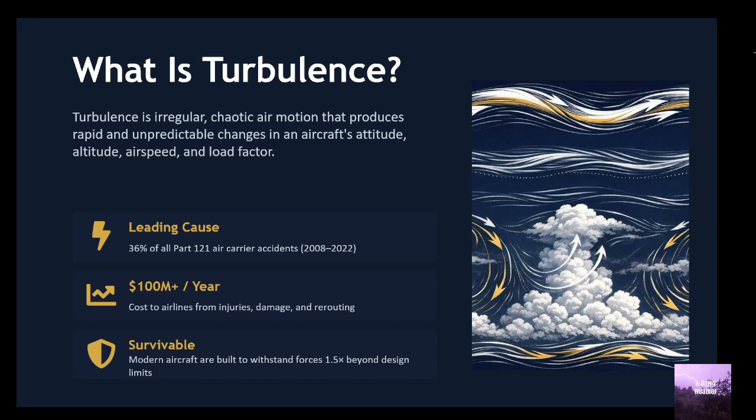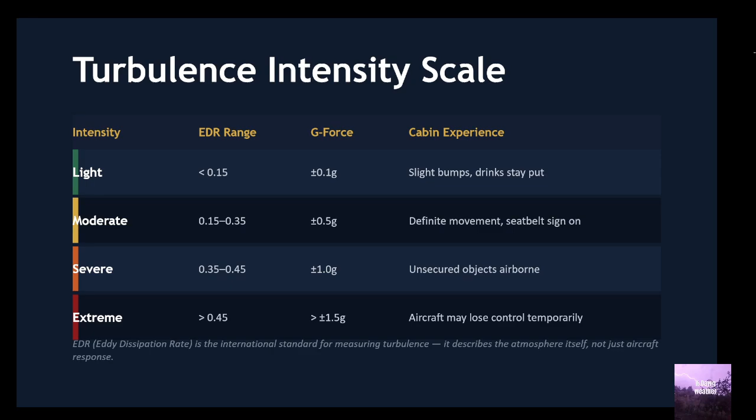Next intensity is moderate, 0.15 to 0.35. The G-force is 0.5 G. The cabin experience is definite movement, seatbelt sign on. Severe, 0.35 to 0.45, plus 1.0 G. Unsecured objects airborne. Extreme, greater than 0.45, greater than 1.5 G. Aircraft may lose control temporarily.

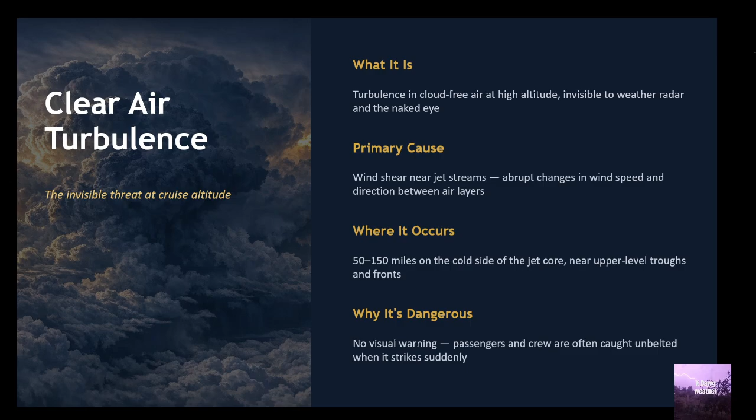Clear air turbulence, the invisible threat at cruise altitude. What is it? Turbulence in cloud-free air at high altitude, invisible to weather radar and the naked eye. Primary cause is wind shear near jet streams, abrupt changes in wind speed and direction between air layers. Where it occurs: 50 to 150 miles on the cold side of a jet core near upper level troughs and fronts. Why is it dangerous? No visual warnings. Passengers and crews are often caught unbelted when it strikes suddenly.

Convective turbulence is generated by vertical air currents from surface heating, the most common type of turbulence in fair weather. Thermal updrafts: the sun heats the surface unevenly, creating rising columns of warm air, strong over dark surfaces like asphalt and plowed fields on hot afternoons. Thunderstorm cells: intense convective turbulence in and around cumulonimbus clouds. Updrafts can exceed 6,000 feet a minute, with severe downdrafts nearby. Microburst: concentrated downdrafts that spread on contact with the ground, extremely dangerous during takeoff and landing phases.

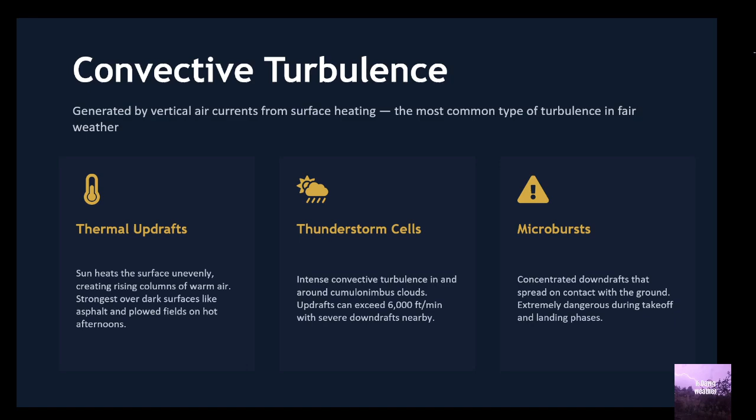Mechanical and mountain wave turbulence. Mechanical turbulence is caused by surface friction and obstacles disrupting smooth airflow. Buildings, terrain, and vegetation create eddies near the surface. Most intense at low altitude and strong winds. Common near airports with nearby structures or terrain. Mountain wave forms when stable air flows over mountain ridges, creating oscillating waves that can extend to the stratosphere. Rotor zones beneath waves cause severe turbulence. Lenticular clouds are visual indications of wave activity.

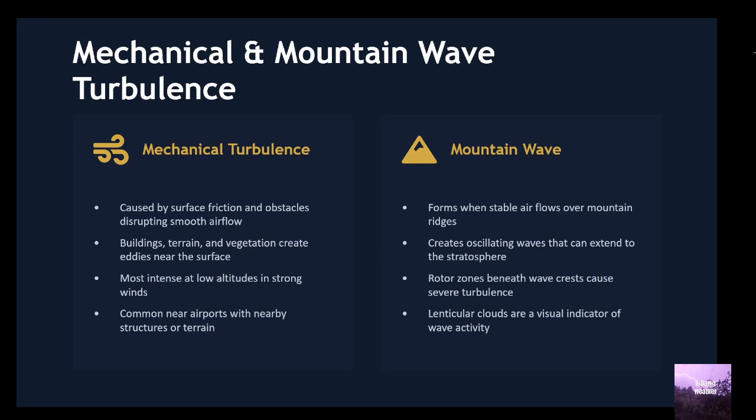Wake turbulence. Vortices generated by aircraft wingtips, a human-made hazard that demands careful separation. 2 to 4 nm required separation behind heavy aircraft. 6 nm, which is nautical miles, required behind the super heavy A380. 900 feet a minute vortex sink rate initially. Wingtip vortices are strongest behind heavy, slow, clean configuration aircraft. Vortices sink at 400 to 500 feet a minute and persist over several minutes. Crosswinds can drift vortices into adjacent runways or flight paths. ATC enforces mandatory spacing intervals based on aircraft weight categories.

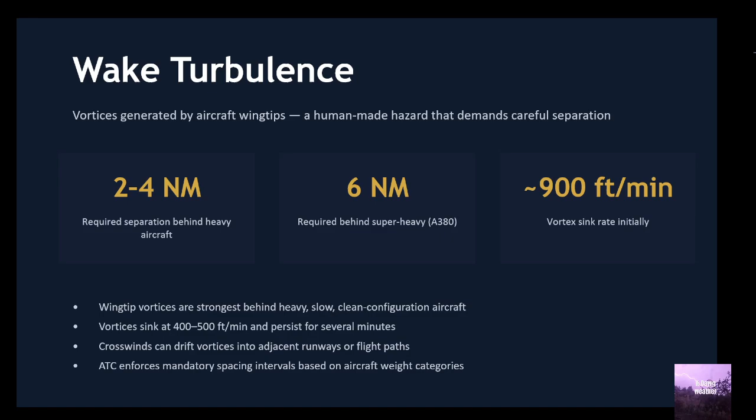How pilots detect and avoid turbulence. Weather radar: onboard radar detects precipitation and convective cells, but cannot see clear air turbulence. Pilot reports, which are PIREPs, provide real-time turbulence data from other aircraft along the route. EDR sensors: automated eddy dissipation rate systems on Delta, United, and Southwest generate 65,000 plus reports daily. Forecast tools: GTG, which is Graphical Turbulence Guidance, provides 2 to 12-hour turbulence forecasts using model data.

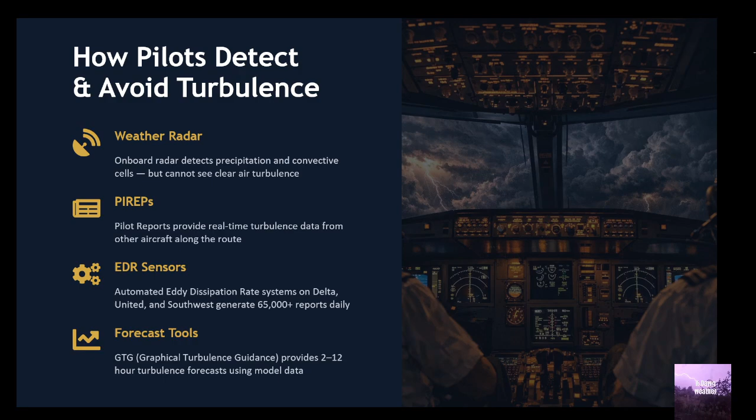Passenger safety. Most turbulence injuries happen to unbelted passengers and cabin crew, not from structural failure. Number 1. Keep your seatbelt fastened at all times when seated, even when the sign is off. Number 2. Stow heavy items in overhead bins securely and keep carry-ons under the seat. Number 3. Follow crew instructions immediately when the seatbelt sign illuminates.

Number 4. Choose a seat over the wing for the smoothest ride, closest to the center of lift. Number 5. Check turbulence forecasts before flying using apps like Turbulence or airline weather maps. Number 6. If standing, brace yourself by gripping the seat headrest. Avoid walking during advisories. So far, 207 reported injuries on U.S. commercial flights between 2009 and 2024.

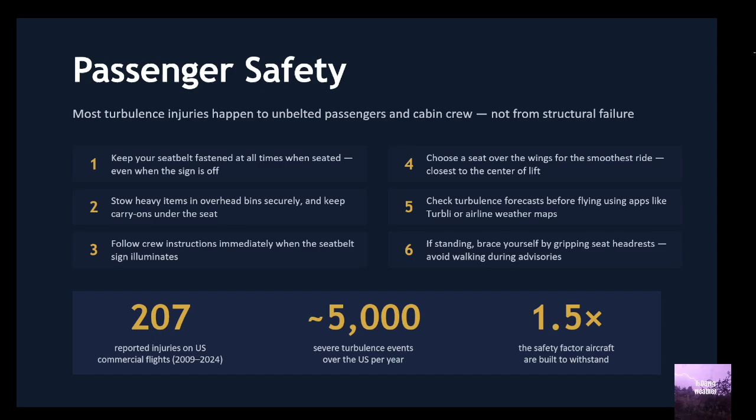5,000 severe turbulence events over the U.S. per year. 1.5 times the safety factor aircraft are built to withstand. Built to handle it. How aircraft engineering makes turbulence a non-issue for structural safety. Wing flex testing. Wings tested to flex up to 25 feet beyond normal range. Boeing 777 wings bend 24 feet upward during certification without failure.

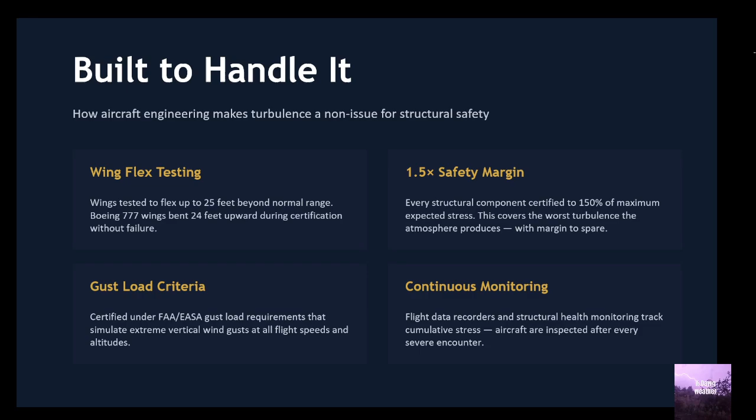Gust load criteria. Certified under the FAA/EASA gust load requirements that simulate extreme vertical wind gusts at all flight speeds and altitudes. 1.5 safety margin. Every structural component certified to 150% of maximum expected stress. This covers the worst turbulence the atmosphere produces, with margin to spare. Continuous monitoring. Flight data recorder and structural health monitoring track cumulative stress. Aircraft are inspected after every severe encounter.

Climate change and turbulence. 55% increase in severe clear air turbulence at some locations from 1979 to 2020, according to a 2023 University of Reading study. Jet stream intensification. Climate change increases temperature gradients in the upper atmosphere, strengthening jet streams and the wind shear that causes CAT. For every 10 minutes spent in severe turbulence today, it could be 20 to 30 minutes in the future.

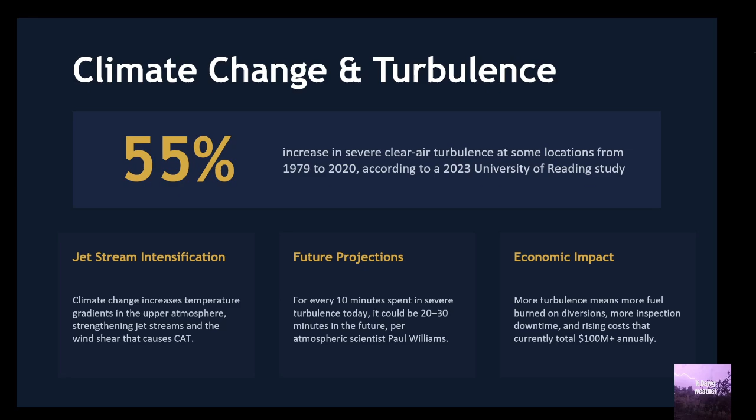The atmospheric scientist Paul Williams. The economic impact. More turbulence means more fuel burned on diversions, more inspection downtime, and rising costs that currently cost 100 million plus annually. Here are some notable turbulence incidents.

May 2024, Singapore Airlines SQ321, London to Singapore, 178-foot drop in 4 seconds over Myanmar, 1 fatality, 104 hospitalized, severe clear air turbulence. July 2025, Delta Air Lines, Salt Lake City to Amsterdam, severe turbulence at 37,000 feet, 2 serious injuries, 18

hospitalized. July 2024, Air Europa, 40 passengers injured during severe turbulence, led to Singapore declaring turbulence a state-level safety risk. Note, Singapore has now classified severe turbulence as a state-level operational safety risk, alongside mid-air collisions and loss of control in flight.

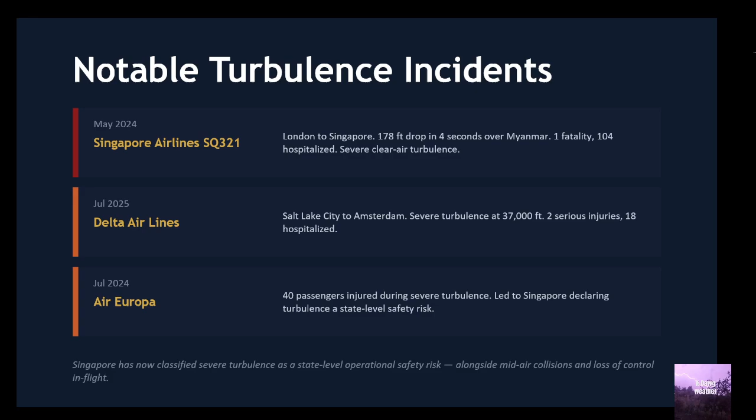The future of forecasting. In situ EDR systems. Automated turbulence sensors on Delta, United, and Southwest generate 65,000 plus daily reports, expanding to more airlines and cockpit laptops. AI-powered forecasting. Machine learning models trained on decades of atmospheric data are improving turbulence prediction accuracy and lead times.

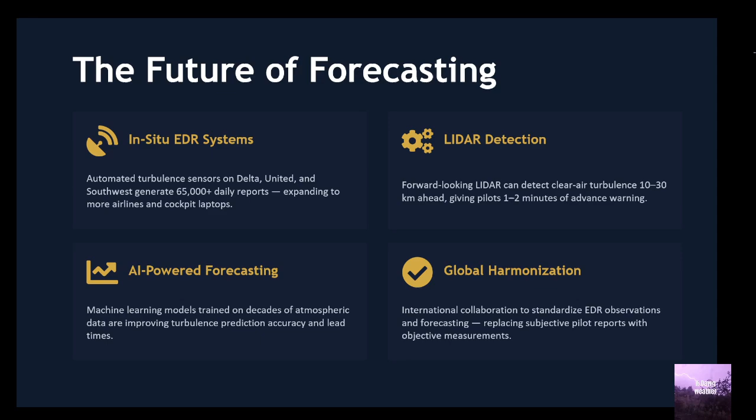LiDAR detection. Forward-looking LiDAR can detect clear air turbulence 10 to 30 kilometers ahead, giving pilots 1 to 2 minutes of advance warning. Global harmonization. International collaboration to standardize EDR observation and forecasting, replacing subjective pilot reports with objective measurements.

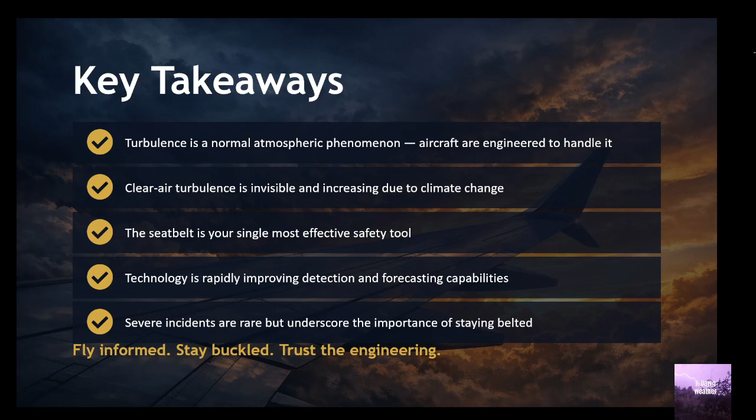Here are the key takeaways. Turbulence is a normal atmospheric phenomenon. Aircraft are engineered to handle it. Clear air turbulence is invisible and increasing due to climate change. The seatbelt is your single most effective safety tool. Technology is rapidly improving detection and forecasting capabilities. Severe incidents are rare, but underscore the importance of staying belted. Remember, fly informed, stay buckled, trust the engineering.